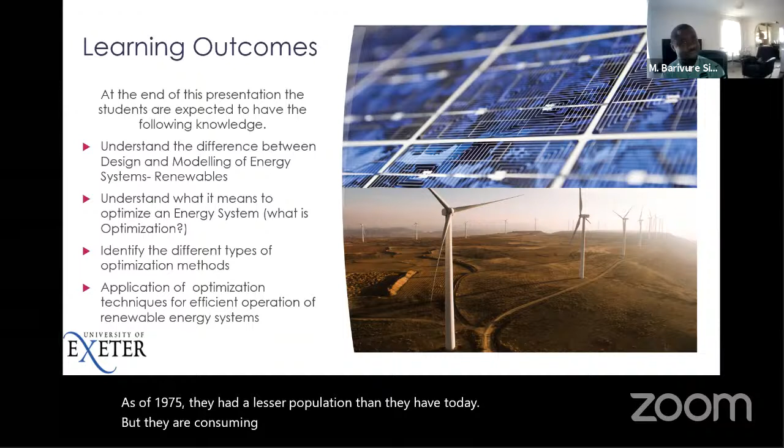I was reading through the United Kingdom energy report, and as at 1975, they had a lesser population than they have today, but they are consuming less energy today than they consumed in 1975. The population increased, but the energy consumption reduced.

What do you think has happened within these 45 years? What do you think has happened? It's all about energy efficiency. They have things now that consume less energy than they used to consume in the past. So energy efficiency has come into play.

And for us to operate our system efficiently, we need to optimize. So this is an aspect we will be looking at.

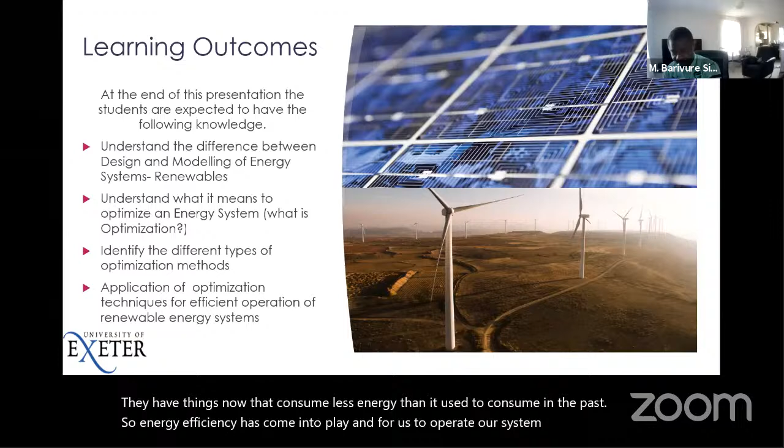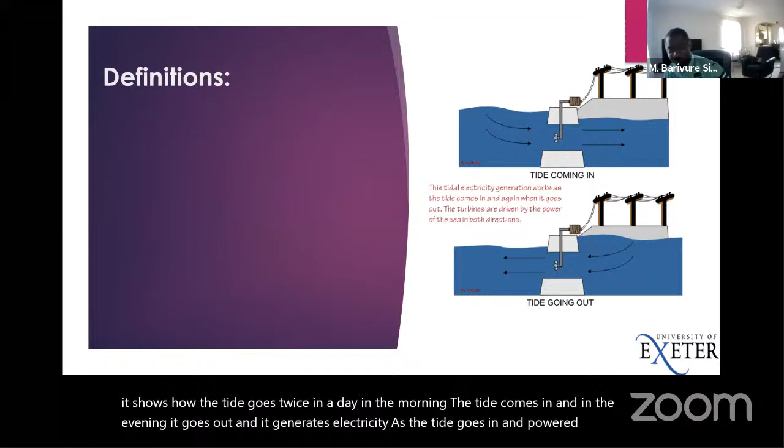Okay, so we look at some basic definitions. The picture on the right is just a sample of a tidal turbine that's rotating, and it shows how the tide goes twice in a day. In the morning, the tide comes in, and in the evening it goes out, and it generates electricity as the tide goes in and out. Irene seems to be an expert in this area because she does a lot of hydrodynamics, so she understands a lot of how this happens.

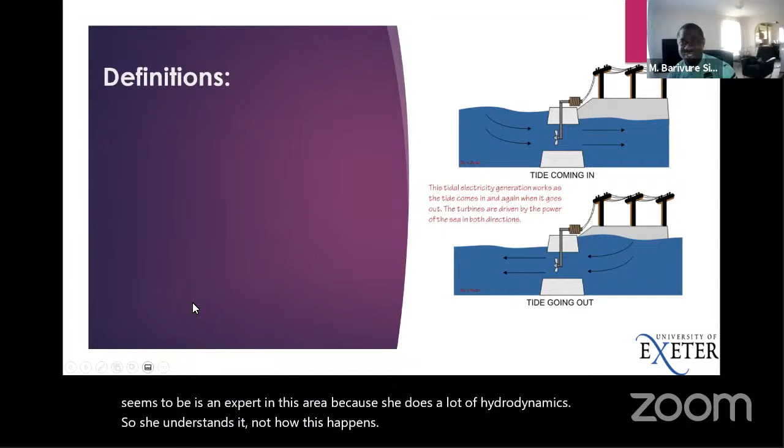Okay, so the first thing we'll define here is engineering design. I did ask the question—nobody, don't be scared, there's no wrong answer. There's absolutely no wrong answer. All answers are correct; they're subject to defense in a way. When you give an answer, you just need to be ready to defend it. It might not be right in a specific perspective, but it's not wrong entirely. So don't be scared, you just have to say so.

Engineering design is a method that engineers use to identify and solve problems. So what does that mean? For you to carry out a design, you must identify a problem, and then you go ahead to try to solve the problem. That's the design process. For example, you need a car because you take a long walk and want to get to your destination faster. That's a problem. Time—you try to design something.

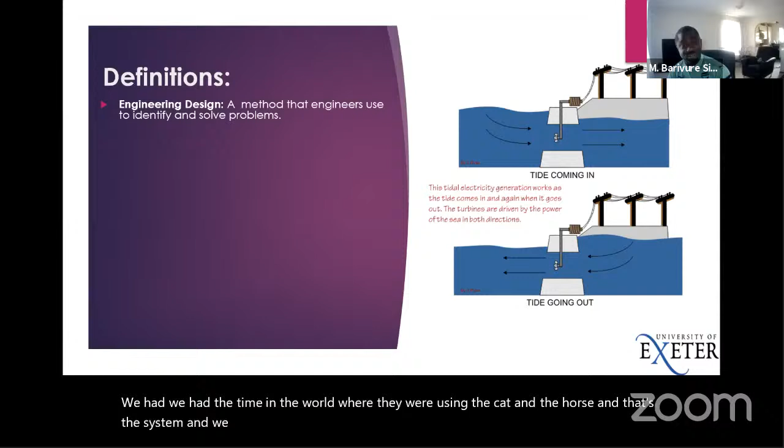We moved from designing... we had a time in the world where they were using the cart and the horse, and that's the system. We moved into building engines and all that, and now cars have become more efficient. Today we have electric cars. This is what engineers do—they design and they solve problems. So a method that is used to identify a problem and solve it is simply known as engineering design. This is a very simple definition. If you want to go into the details of engineering design, there's a lot of things we could look at.

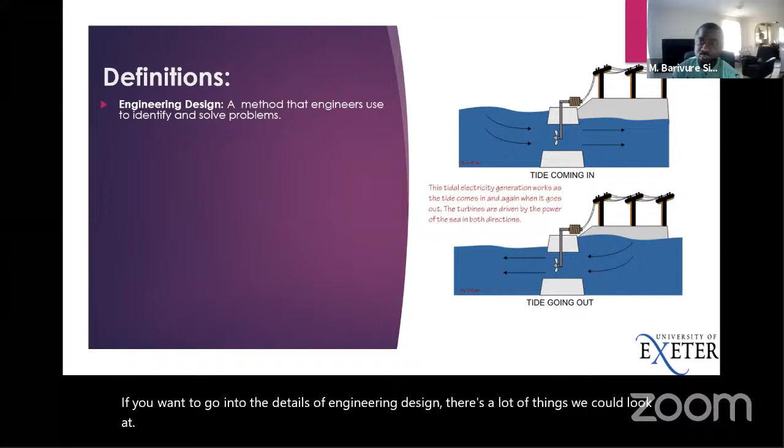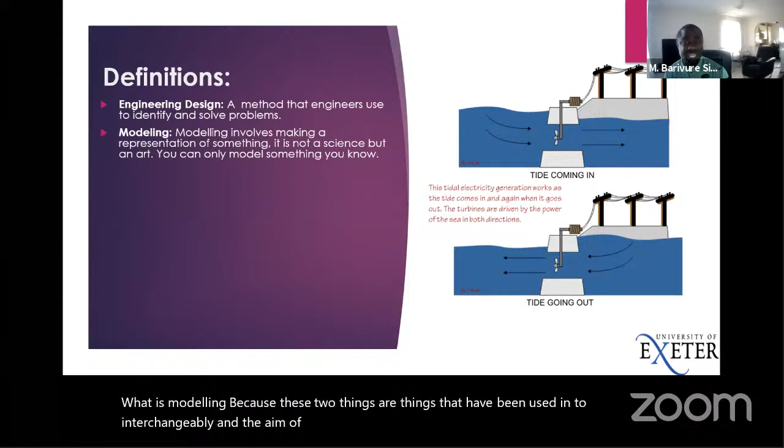So then, modeling—what is modeling? These two things have been used interchangeably, and the aim of this seminar is to create a clear distinction between the two of them. Modeling involves making a representation of something. It is not a science, but an art. You can only model something you know.

Now, if you go back to engineering design, engineering design does not tell you that you must know it. You identify it, then you begin to make effort to solve it. For you to model something, you must have knowledge about what you're modeling. And so that's why you must design before modeling.

Now, modeling is something that in the current day we are in, a lot of programmers model. So if you're a design engineer, you can design your work, look for a good modeler and work with the modeler, and he'll be able to model your design. Because when you model, that's when you can now improve on your design. It's a two-way thing—for you to model, you must have a design. After modeling, you can test your design and then improve on it. So there's a way: design, modeling, back to improving the design, then remodel, then implementation.

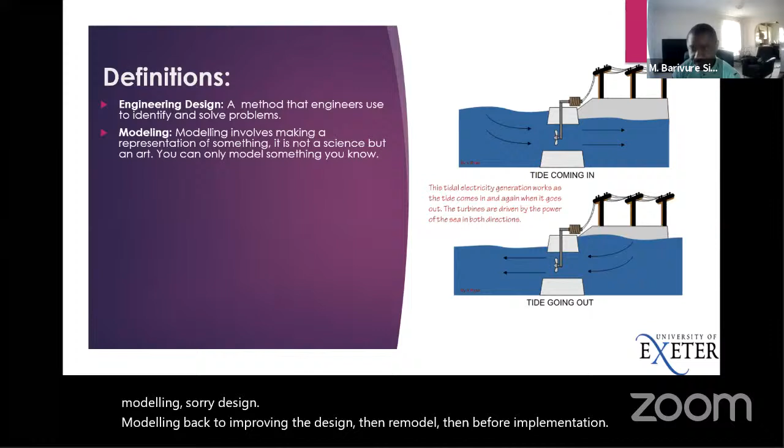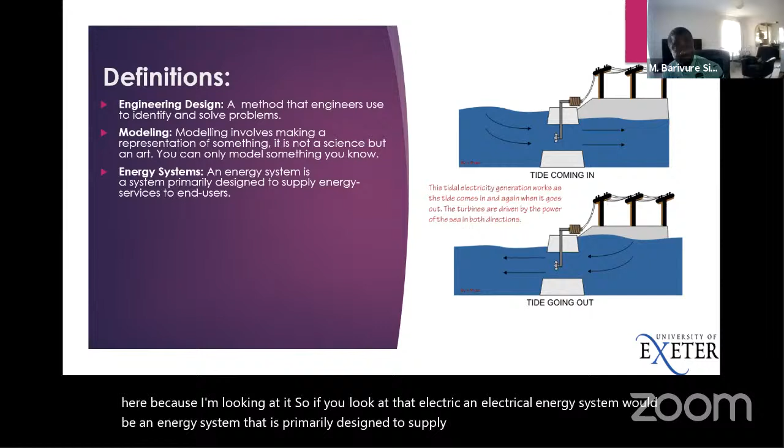So we're looking at energy systems. An energy system is a system primarily designed to supply energy service to end users. I did not specify what type of energy here. So an electrical energy system would be an energy system primarily designed to supply electrical energy services to end users. If you want to look at any other energy systems, what it will do is primarily supply that type of energy to whoever needs it.

And that's what energy systems are.

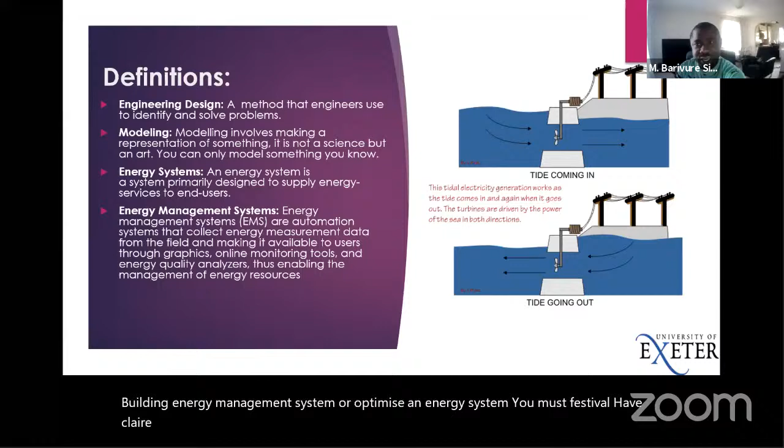Then we look at energy management systems. This is the base of optimization, and this is the area we're going to be focused on in this presentation: energy management systems and optimization. But I need to give you a brief review of some of the steps that lead us here. You can't just begin to build an energy management system or optimize an energy system. You must first have a clear understanding of certain things that could lead there. That's why we're coming from engineering design, modeling, understanding what an energy system is, and then we look at what an energy management system is.

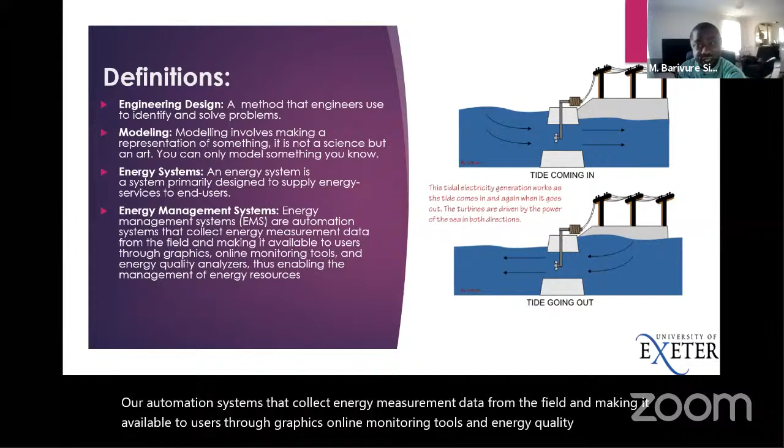An energy management system, popularly called EMS, is an automation system that collects energy measurement data from the field and makes it available to users through graphics, online monitoring tools, and energy quality analyzers, thus enabling the management of energy resources. So what does an EMS do? It sits between different energy sources.

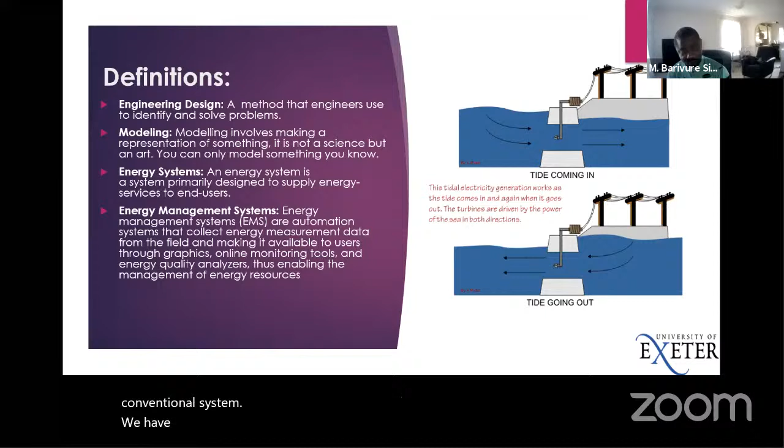So if you've got three different energy systems, let me come out a bit from the renewables and look at the conventional system. We have a gas turbine, a diesel generator, and a coal-fired plant. These are three different types of conventional energy systems using different fuel systems, though they are all thermal systems. Now, an energy management system can sit in between these and decide which source to use at every point in time, depending on the load.

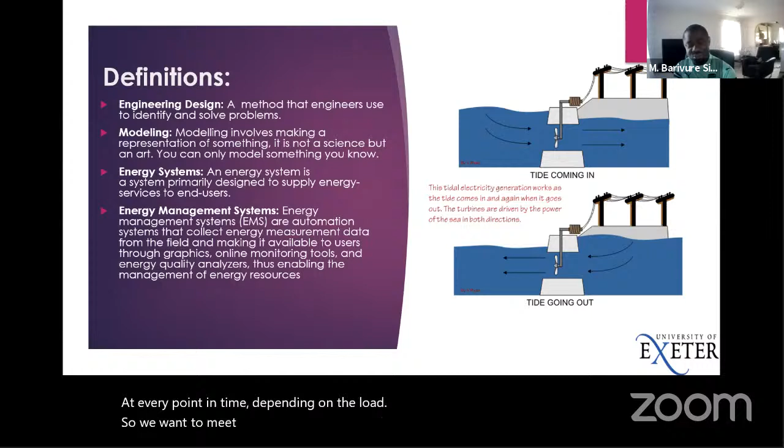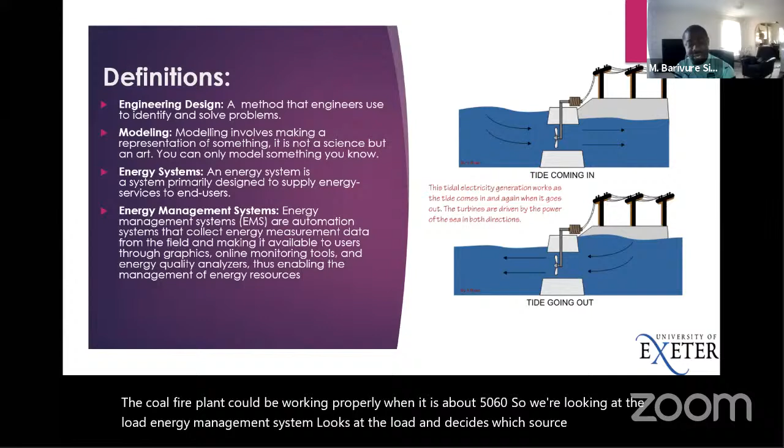So we want to meet a load, and you look at these three systems. The gas turbine works more efficiently when operating at about 80% and above. The diesel generator works efficiently when below 50%, giving you lower cost. The coal-fired plant works properly at about 50 to 60%. So we are looking at the load. The energy management system looks at the load and decides which source should power the load at every point in time. That's what it does—it manages the system efficiently to minimize and reduce the cost of operation.

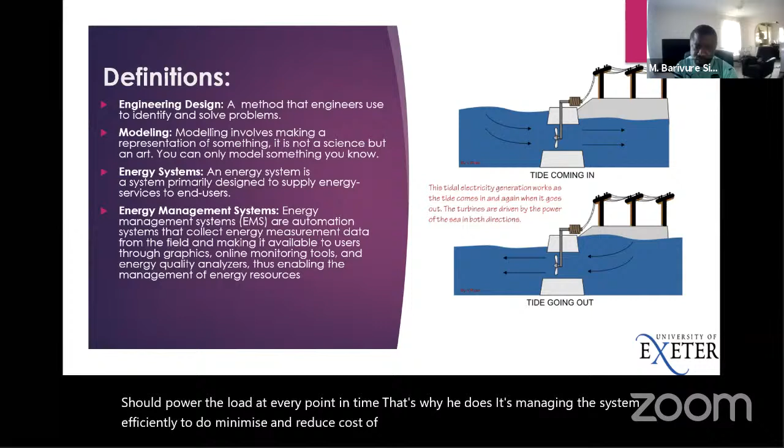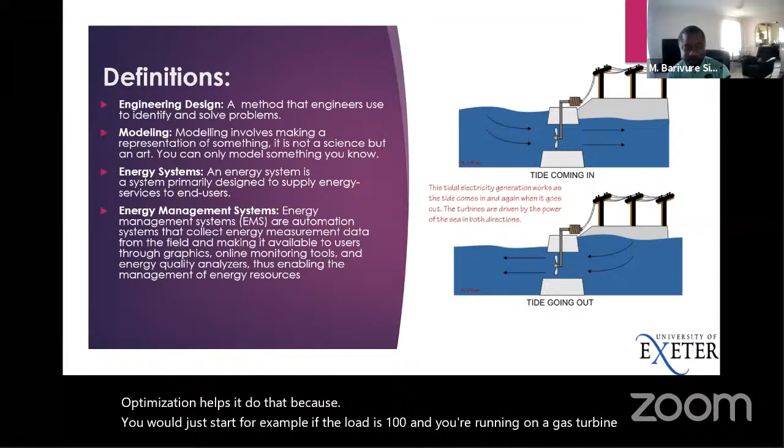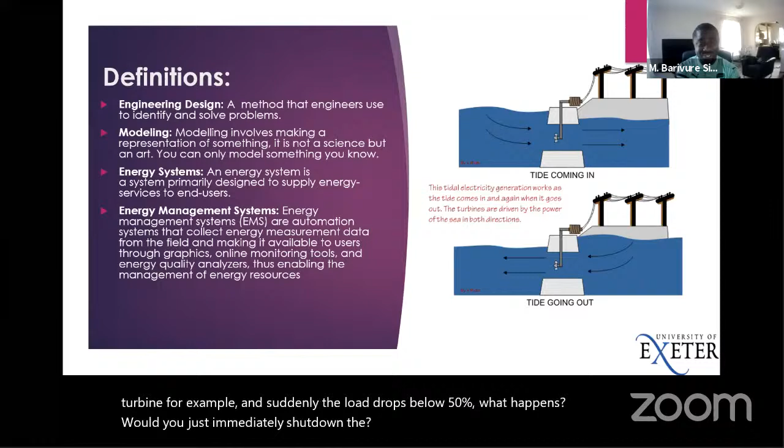Now the idea is, when it does that, how does it change from one turbine to the other? And that's where optimization comes in. Optimization helps it do that, because you wouldn't just start—for example, if the load is at 100% and you're running on a gas turbine, and suddenly the load drops below 50%—what happens? Would you just immediately shut down the gas turbine and begin to use the diesel generators? How would that happen? The optimizer does all of that for you. And that's why you need to understand the modeling. Then you bring in the energy management system, and then optimization comes in to solve the problems.

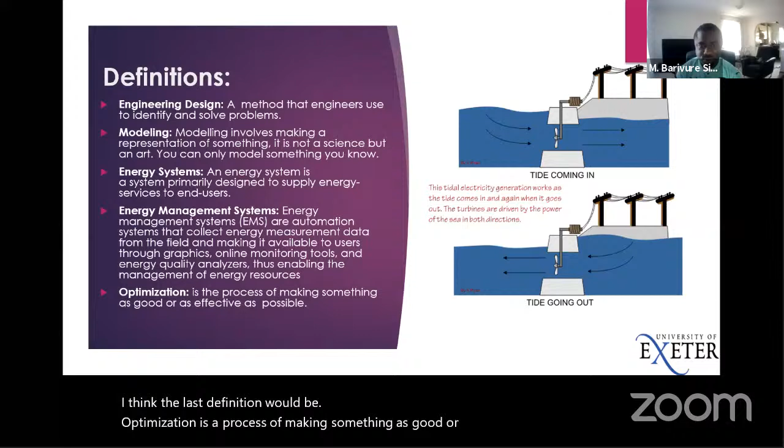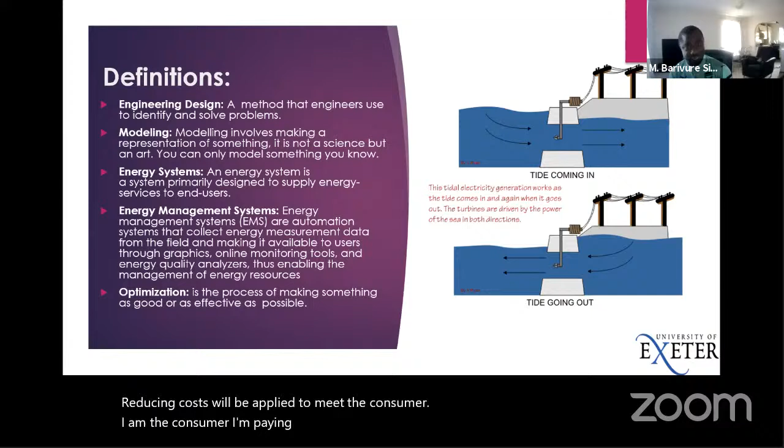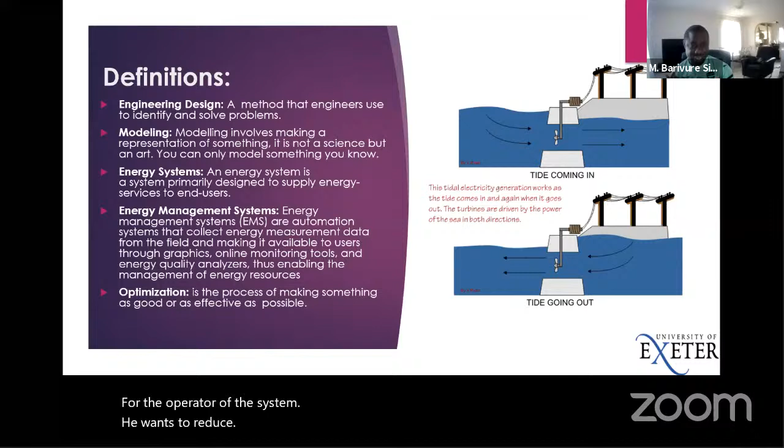I think the last definition would be optimization. Optimization is a process of making something as good or as effective as possible. So in energy systems, we look at three things: we want to reduce cost, we want to reduce our energy consumption to make it more efficient, and we also want to minimize cost. There's a difference between reducing cost and minimizing cost. Reducing cost applies to me, the consumer—I am paying for electricity and I want to minimize the cost I pay for it. For the operator of the system, he wants to reduce his cost of generating electricity. So we have these three networks put together: you want to minimize cost, reduce energy consumption, and minimize cost. These three things put together is what the optimizer would do.

So let's look at the different types of renewable energy systems and do a bit of explanation of how they operate, so that we can now look at the modeling aspect.

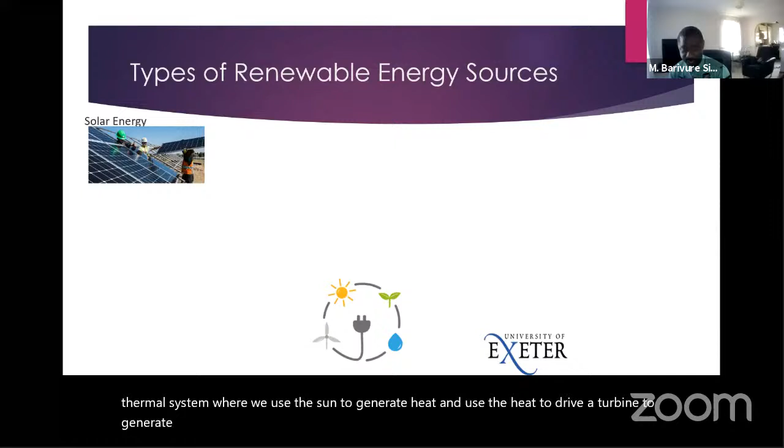So we have the solar power system. We know the solar power system is just converting energy from the sun to electrical energy. Our focus would be the solar PV systems, because there's a solar thermal system where we use the sun to generate heat and use the heat to drive a turbine to generate electricity - that's another system. The solar energy system produces direct current voltage because it has no rotating parts, so wear and tear is protected in this system since there's no friction going on, which keeps the system safe.

So we look at how does the sun generate its power? The power from the PV, this equation is what is used to generate power from the PV panel. If you look at it clearly, it's a model - this is how models are developed. You look at the solar panel and then you begin to develop the model, normally called a mathematical model: PPV is equal to APV, IRPV, and ηPV.

What this represents: this is the area of the PV panel, this is the irradiation - the radiation that falls on the PV panel - and this is the efficiency of the panel. That's the three main components. But the main things considered are the area of the panel and the radiation of the sun. Those are the two things considered in order to generate power from the PV system.

Now the efficiency is very important. How is this efficiency defined? We have a second equation that defines the efficiency of the panel, because you could have a particular area and a particular irradiation, and by the time you put them together to give you a good number, but by the time you actually measure what comes out of the PV panel, it is far, far short of that. What's the reason? The efficiency of the system, defined using this equation.

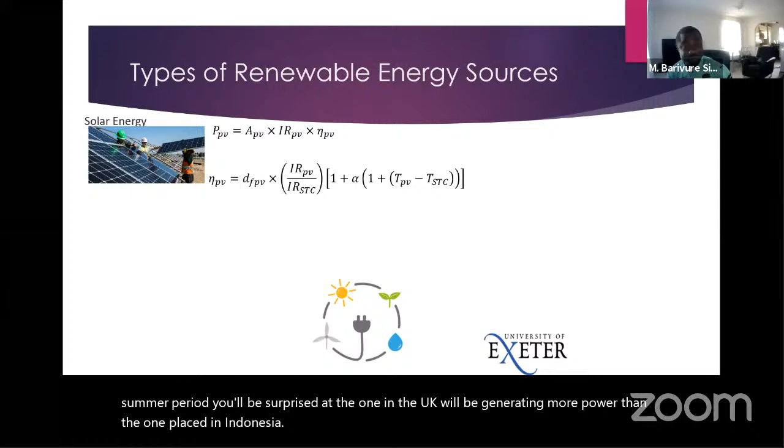You'll be surprised that if you put the same size PV system in Indonesia and the same size PV system in the UK during the summer period, the one in the UK will be generating more power than the one placed in Indonesia. What will be the reason? Maybe during the summer in Indonesia you're getting 30, 35 degrees temperature, while in the UK they're hardly seeing 20, 22 degrees, which is below the standard test.

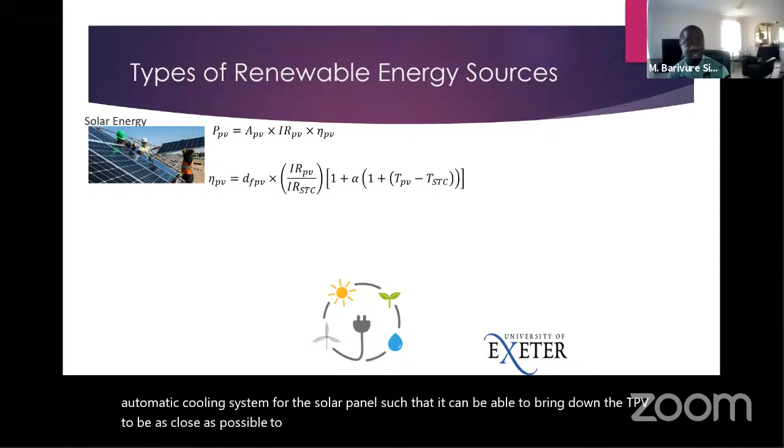So the efficiency of the PV panel would be higher here, and so it will give them more power than having it in Indonesia. Now this is a subject of many research studies. A lot of researchers are going into trying to develop cooling systems that will create automatic cooling for the solar panel, such that it can bring down the temperature of the PV to be as close as possible to the standard temperature required to run the panel. Many researches are going on in that area.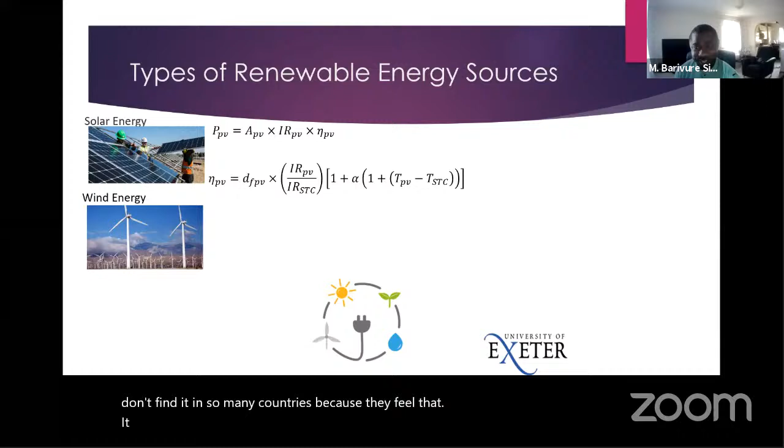So we have the wind energy system. This is a big subject of controversy because a lot of people don't even want it - that's why you don't find it in so many countries, because they feel it defaces the environment. Having this rotating thing all the time is not as beautiful as people would presume it should be. So it's a subject, and it's a rotating system. It can produce AC or DC depending on the converter system that is used.

Because it is rotating and has a rotating magnetic field, the output power of a wind turbine would be AC. But because the fuel that drives the turbine is not controlled by you or me, it is nature. We do not know the wind speed; it keeps changing with time.

So the AC power produced from the turbine would be fluctuating. That's why we have what is called maximum power point tracking, where you convert that AC to DC, and then convert that DC back to AC in order to get a smooth power out of the turbine. This process has a lot of losses as well.

We'll look at the equation that produces the wind power. The wind operation, the tidal operation, and the hydro turbine are all the same because they are all working on a rotating system. So they have a very similar system.

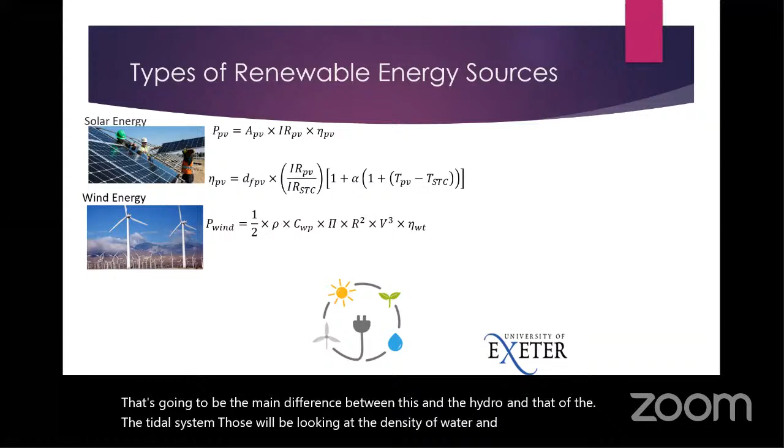You have the density of air. That's going to be the main difference between this and the hydro and tidal systems, which look at the density of water. Water is far more dense than air, and that's why you can see your water, but you cannot see the air, you can only feel it.

So for the wind turbine, you have the density, you have the power coefficient, and because it is rotating in a circle, you have pi, you have the radius, and you have the velocity, which is the actual speed. And then you also have the efficiency of the turbine. This is what is considered.

In designing the wind turbine, there are certain stages that they look at. One stage is what they call the cut-in wind speed, they also have the cut-out wind speed, and they have the operating wind speed. So you could have a wind turbine where the wind is at a certain level, but it is not generating power because it is not up to the cut-in wind speed.

There's a level the wind will get to where it will not be generating. Though you'll be very surprised, you'll feel there's so much wind, but the turbine will not be generating because it is not designed to stand that kind of wind. So it will just lock itself and stop operating. That's the way the wind turbine is.

We have the hydro system, and the hydro system uses water just in place of wind to drive a turbine and generate electricity.

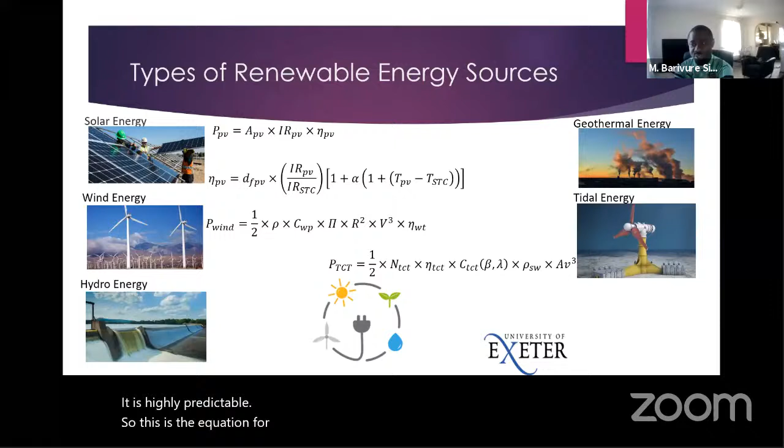So this is the equation for the tidal turbine. If you look at the equation for the tidal turbine and compare it with the equation for the wind turbine, you would see that they are closely related.

Biomass. We all know what biomass is. That's another source of renewable energy. These are the six main sources of renewable energy. There's also the wave energy converters, which are also renewable.

And if I may ask, to make it a bit interactive so that I don't just keep talking, is a nuclear energy power station a renewable energy station? Can somebody just give me that answer? A nuclear energy station, is it a renewable energy system?

Marvin asked, is the question only for students, or can lecturers also answer? Students should answer, oh students. I'm sorry, so I cannot give the question to other people then. Okay students, you hear from Marvin, so it's time for you to answer.

Yeah. Okay. I want to answer. Okay, just say your name. Say your name. Oh, I'm sorry. My name is Avicenna. Okay, Avicenna. My name is Avicenna. I'm from PENS, Surabaya.

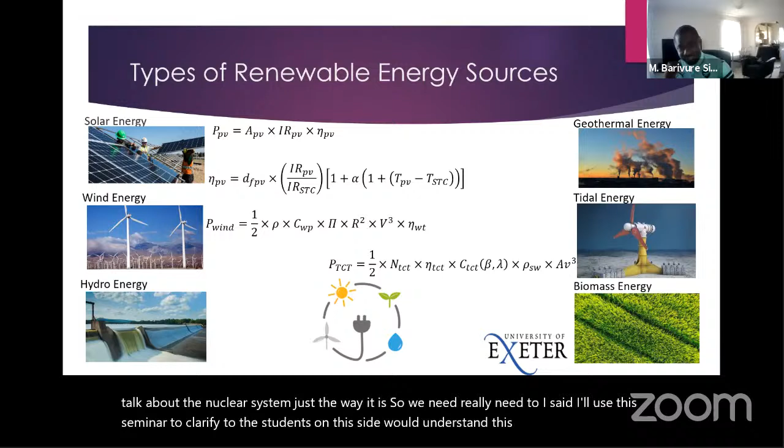So I said I'll use this seminar to clarify, to see if students on this side would understand or know this, so we can clarify it once and for all. If that's all you take from this seminar, it's a plus for me. Any other view?

Okay, I'll answer the question. The nuclear power plant is non-renewable, because nuclear reactors make use of uranium. Uranium is a source of energy, but it is not renewable. It is produced and buried under the ground. That's why they don't build nuclear stations everywhere. Most nuclear power stations are built very close to the sea, where they store the uranium under water for cooling, because if it begins to explode, it's an issue.

Now, the fact is that the nuclear power station is non-renewable, but it is clean. That's why, in the talk about reducing carbon on the earth and trying to turn down the conventional power system, they tend to allow the nuclear power system to function. Though it's expensive to build and expensive to maintain, it lasts thousands of years. But it's a non-renewable system. You need to know that, but it is a clean energy system.

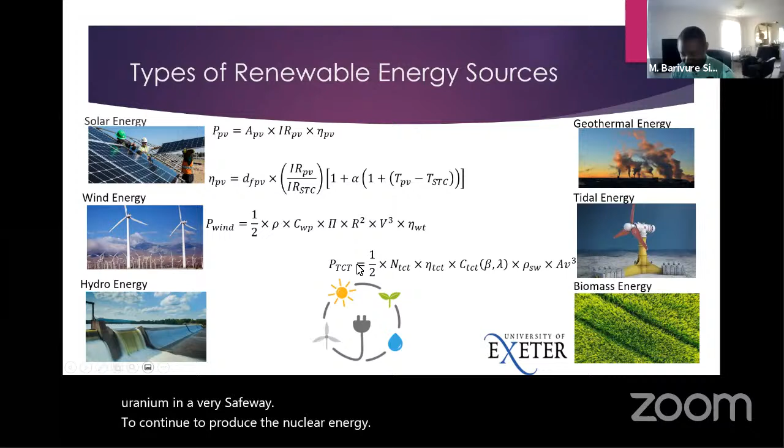Now, energy storage. I added energy storage at the last minute to this presentation. We're talking about renewable energy. We are not in control of the fuel that renewable energy uses. It's nature. We cannot tell when we will have sun and when we will not, although we can predict it. And sometimes you have excess sunlight, you produce energy and it's wasted. So we need something to store our excess energy and use it.

For example, for a solar powered system, during the night you don't have any solar. You have solar power during the day, maybe from 10 a.m. in the morning to 4, 5 p.m. in the evening. So if you generate more than you need, you store it. Once the solar is down, you use the storage rather than going back to the conventional system. Energy storage serves a lot of functions, and we will see what those are from the generation part to transmission, distribution, and down to the consumer.

So for the generation, this is what the energy storage does. What's called AGC could be also known as fast frequency response. So it's automatic generation control. So we know that when load begins to change, when you're generating power and load begins to rise and fall, for example, in a conventional system, there's what is known as the ramp up time and the ramp down time of generators. So generators don't just ramp up. So if the load changes very fast, the storage system can act as a fast frequency response, so it can cover up for the load increase for the period while the generators are ramping up.

So it does that. It does primary frequency control, which is what I've just described. You know, power has to be run at a certain frequency. I don't know what frequency Indonesia runs on, but here in the UK, we run on a 50 hertz frequency. So once the frequency begins to drop below 50 hertz, there is a problem. And so the energy storage system is used to cover this. So once the system is getting overloaded, the frequency begins to drop. As the frequency drops, the energy storage system can respond very fast and take the frequency back to normal, saving the time while the conventional generators ramp up.

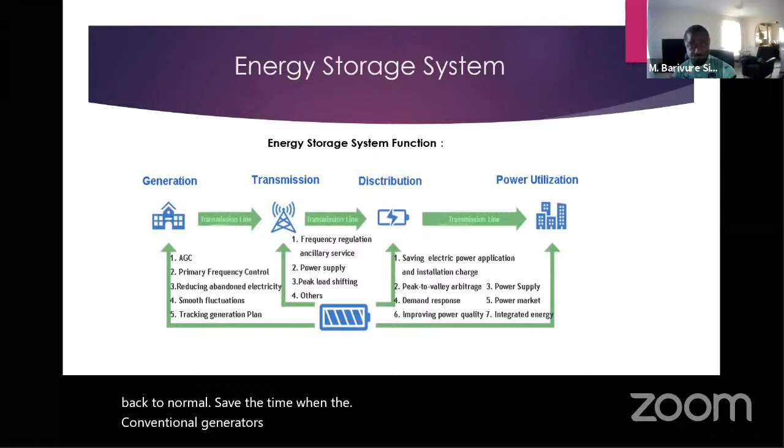So it reduces abandoned electricity. I explained that when we were talking about the solar panel. When you have excess solar, instead of dumping it, you store it in your storage. It smooths fluctuation. So you see, for renewable energy systems, we don't have a control. We have lots of fluctuations. The energy storage system can come in to manage those fluctuations. All of this has to be done in a very optimal way, and that's why we talk about optimization. You can also use it to track generation plan.

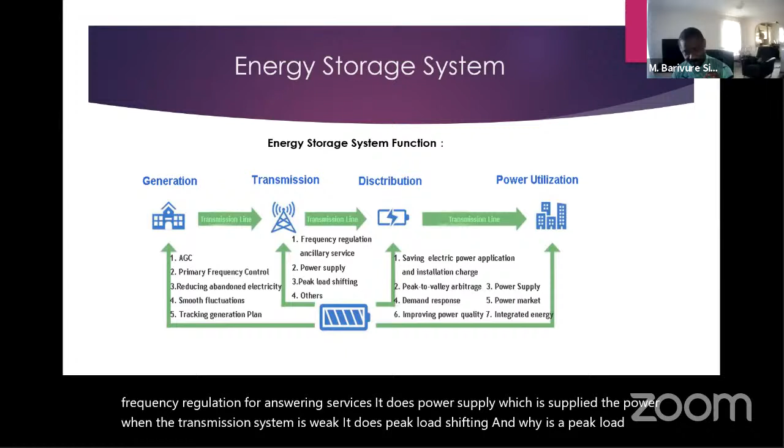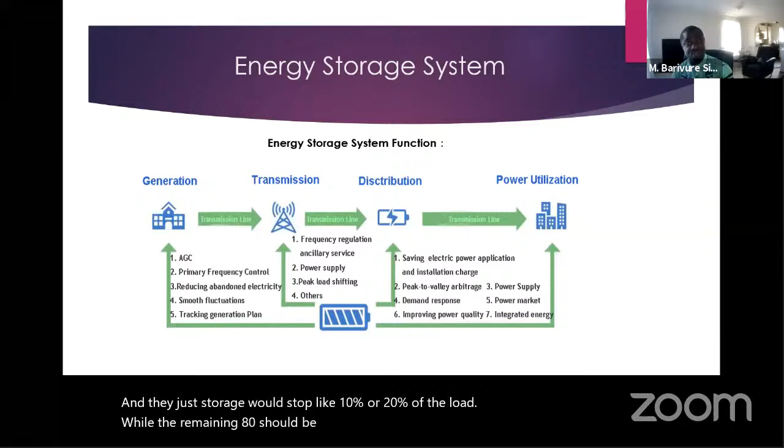For the transmission system, it also does frequency regulation for ancillary services. It does power supply, which is supplying the power when the transmission system is weak. It does peak load shifting. And when you say peak load shifting, for systems that have got a tariff model, maybe in the middle of the night, you've got low tariff, and during the day, you've got higher tariff. So if you charge your battery at night, during the day, you can now do a bit of peak load shifting. You can decide that, okay, my energy storage would supply 10% or 20% of the load, while the remaining 80% would come from the conventional system, and that reduces your energy tariff.

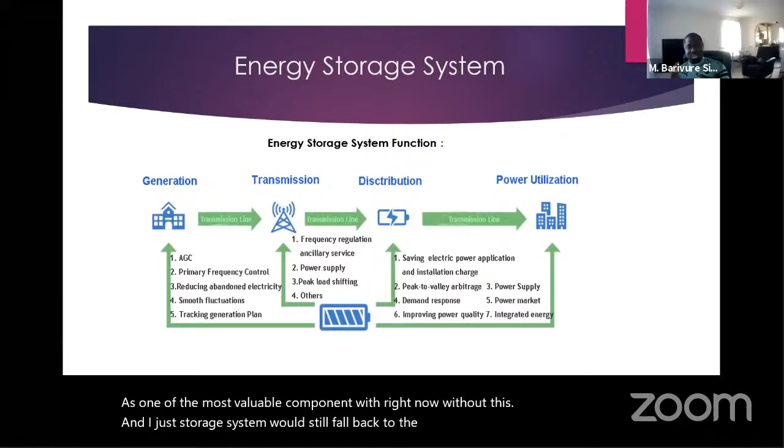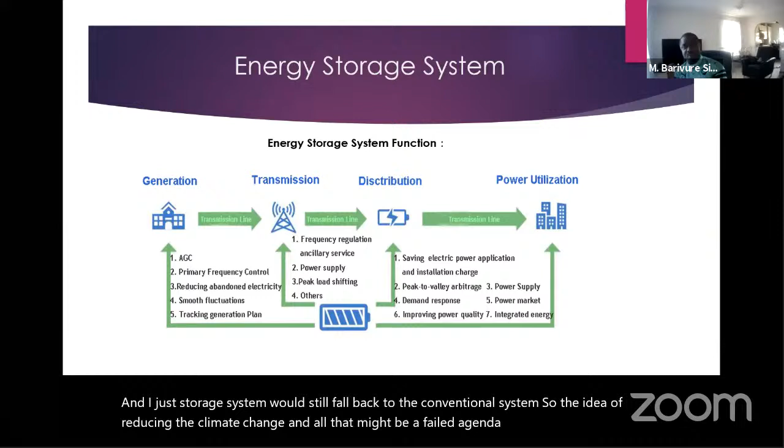For the distribution side, it saves electric power application and installation charges, peak to valley arbitrage, demand response. So that's like fast frequency response, and it improves power quality. Then it is used for an integrated energy market. So in the new system we have, which is the renewable energy market, the energy storage is one of the most valuable components. Right now, without this energy storage system, we will still fall back to the conventional system. So the idea of reducing climate change might be a failed agenda if energy storage does not ramp up to meet the challenge. Okay.

So we'll look at design of renewable energy systems. I'll just talk about two designs here because our time is already far spent, and I'll go through them very fast. I wouldn't spend as much time as I have spent earlier. To design a solar PV system, the following components are required. We'll just look at it. The PV module that converts the sunlight to electricity. The maximum power point tracker. I didn't talk so much about this, but what this does is to track maximum power from the PV system.

If you look at the PV power curve, it goes round and there's a maximum power point, where at every point in time, you want to get the maximum out of what is produced. It's a power electronic device, and what it does is just track maximum power. You find this in every variable system, like the wind turbine, the tidal systems, every renewable energy system where you cannot predict the output at every point in time. It's a very important component in renewables. Then we have the inverter, because the power that we use at home is AC. So if the PV generates DC, we need to convert that DC to AC, and that's what the inverter does.

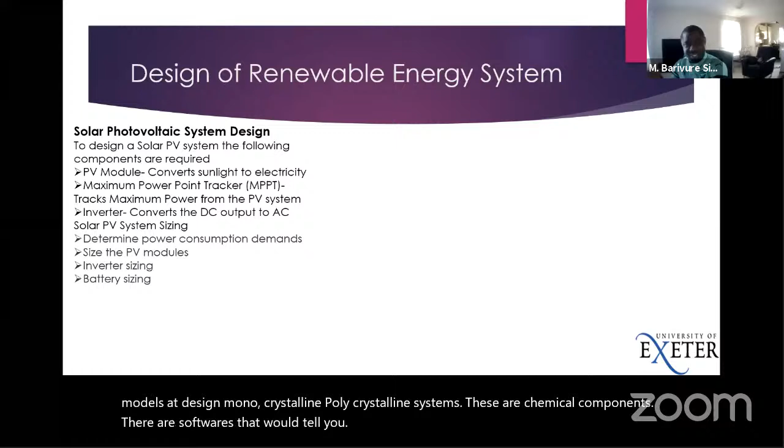There are softwares now that will do all of this. So once you have all the basic information, all you need to do is to input that information, and it will tell you the actual size. Funny enough, it can even tell you the type of PV system, because there are different types of modules designed, monocrystalline, polycrystalline systems. These are chemical components. There are softwares that will tell you the exact type you should use for a specific area based on the kind of sunlight or irradiation you have and the load pattern you have. It will tell you exactly the sizes. And once you apply that, you would get optimum efficiency.

Solar charge controller. If you have a battery, you don't want to destroy your battery. That's one thing, you don't want to destroy them. Batteries are a very delicate issue. I could talk about batteries for very long because I've been studying batteries for a while. In battery models, normally the manufacturer would tell you this battery should last you for say 10 years. But you could get into using that battery, and after 4 years, the battery dies. That means there are certain things the manufacturer may not have given you in detail.

If my battery will last for 10 years, there's a condition under which that battery has to be operated for it to last those 10 years. Anything below that could shorten the life of the battery. And so all of these are things that you can do within system design, modeling and optimization.

We'll look at the wind turbine system. And this is what the wind turbine system looks like in detail. So this is not just a turbine now. We'll look at the mechanical components in the wind turbine. We'll look at the direction of the wind. We'll look at the rotor, which is the blade that rotates, and the hub. Now I'll give you this. If someone can answer me this, I'll be very happy. What's the difference between the wind turbine and the fan in your house? They've got blades, they rotate.

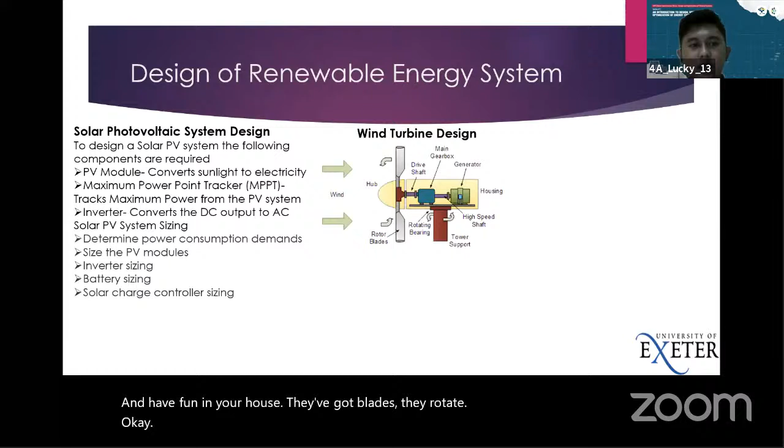I want to try to answer. Okay, my name is Lucky. I'm from Penn. Wait, can you hear my voice? Yes, I can hear, but if you're louder, I would appreciate it.

Okay, sir. I think the difference between the wind turbine and the fan in my house is that the wind turbine uses the wind to rotate the turbine to create electricity, but the fan uses electricity to rotate the blade. I think.

That's correct, that's the difference. This one uses the wind to generate electricity for use, while the fan in your house uses electricity to generate the wind or breeze in your house. That's the main difference. If you look at both of them, the structure seems similar - a ceiling fan has 3 blades, just like the wind turbine.

You also have wind turbines. What we have here is the horizontal system, which is the most common wind turbine. You have the vertical system wind turbine, which is not very common because its energy efficiency is quite low. So that's why people now go more for the horizontal axis wind turbine.

But the wind turbine has these few things. The wind comes in from here, hits the blade. As the blade rotates, the rotor, which is hidden inside the hub, rotates. Then it begins to work like any other generator, like your diesel generator. Once you power it on, the rotor begins to rotate and generate alternating current. That is how this happens.

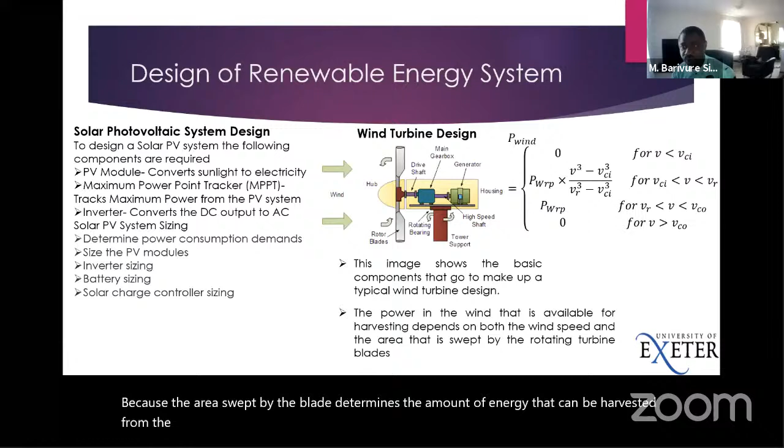So let's look at the modeling. What's energy modeling? By definition, energy modeling or energy system modeling is a process of building computer models of energy systems in order to analyze them. Energy models employ scenario-based analysis to investigate different assumptions about the technical and economic conditions at play.

Now, this is what I like to explain - this is quite exciting, because once you have concluded the design, now you want to play with the system, test the system, and look at how sustainable your system is. You use computer models. Like I told you, it's an art. The design aspect is core engineering - you must have engineering knowledge to design an energy system. But the modeling aspect, anybody can model.

Anybody can model. All he needs is information about the design, and he'll be able to model. And then we model because we want to test different scenarios.

Like we talked about the wind speed, we talked about the operating wind speed lying between the cut-in wind speed and the rated wind speed. We also talked about it lying between the rated wind speed and the cut-out wind speed. So once it is operating at this condition, when you want to test it in a model, you can begin to adjust the operating wind speed, and you would get to the point where you would see the turbine fail in your computer model.

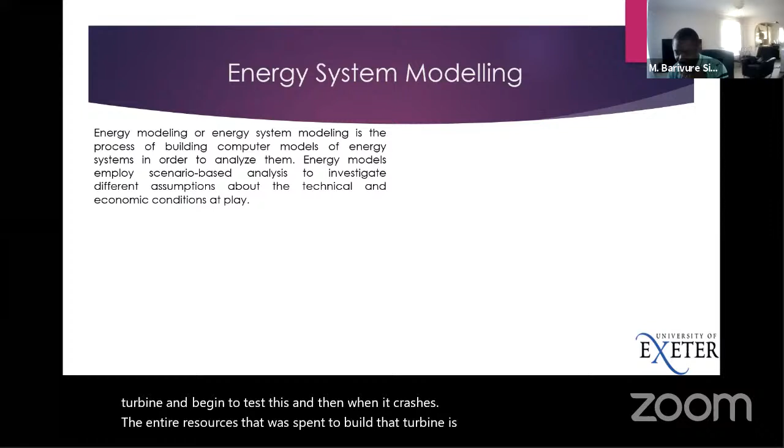Recently, if you follow what's happening in America, one of the unmanned space rockets was launched, and as soon as it took off, it exploded. That kind of system's design was modeled. Maybe they tested it to an extent, but when the conditions changed and went beyond the limit of the test or the scenarios they considered, the rocket came down. Although nobody died because it was unmanned, if people were inside, they would have lost everybody. That's the importance of modeling.

Classification of models in power systems, because what we are focused on now is renewable energy generation. So we have the electricity sector, we have system operational models, and we have power system simulations. Now, what's an electricity model?

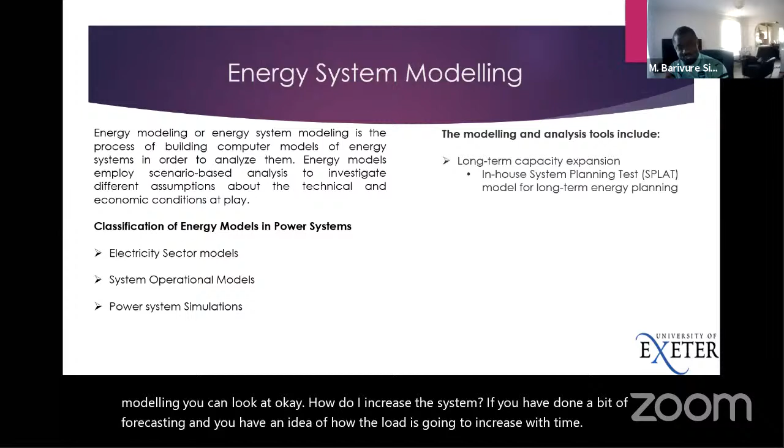The modeling and analysis tool includes long-term capacity expansion. I talked about expansion, so in modeling you can look at how do I increase the system. If you have done a bit of forecasting and have an idea of how the load is going to increase with time, with the models you can begin to change and say, after 5 years, this is what we're going to do. So it's an in-house system.

This SPLAT is a kind of software you can use to do long-term capacity expansion. If you follow it very well, you would be able to sustain energy continuously because you would plan your expansion according to your predictions. In most developing countries today, we don't have a constant power supply, and it's because we don't have good models, so we don't have long-term capacity expansion.

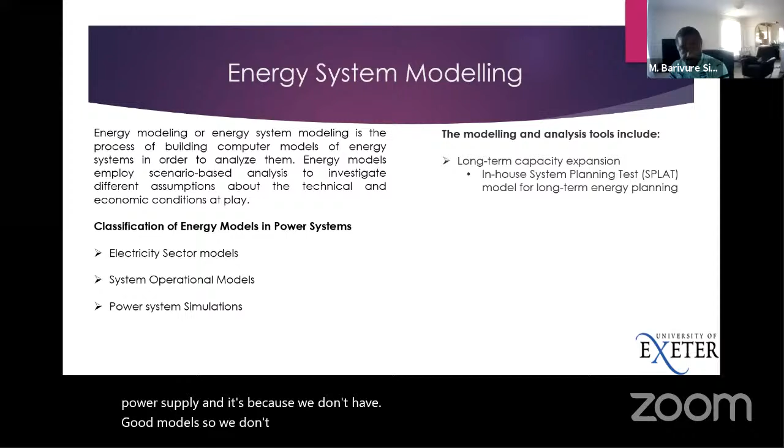In the long run, we have energy generating today that meets our load. Suddenly the load goes so high and then we cannot meet the load anymore because we don't have a proper system for modeling, for planning. So you have unit commitment and dispatch.

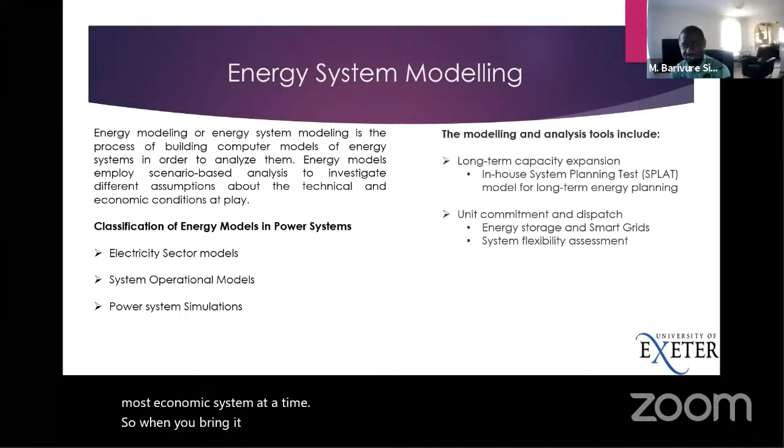Unit commitment and dispatch, in most cases, does not apply in renewable energy systems. But if you look at a microgrid that is grid connected, you can look at unit commitment and dispatch. Dispatch is fine, but unit commitment mostly works with conventional systems because you have to commit the most economic system at a time. So when you bring in energy storage, smart grid, system flexibility assessment, these are things you do when modeling. Modeling is broad.

So you have operational planning, grid integration studies. All these are done within modeling. When you're doing operational planning and grid integration studies, all these are done within modeling.

Energy models are usually intended to contribute to system operation. I put the red, engineering design or energy policy development. Why I put engineering design is because we've talked about design before. So I said, you can design, model, and then go back to redesign. So when you design a system and model it, you put it to test, and you find out things you need to do more, so you go back into design. Energy models could help you improve on your design. That's why I put engineering design in red.

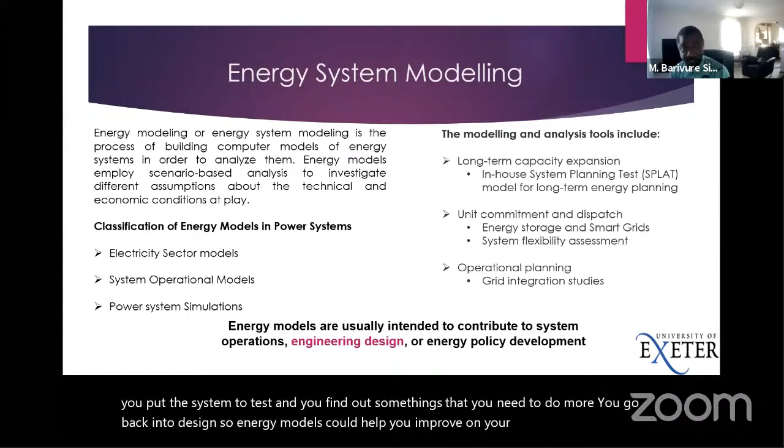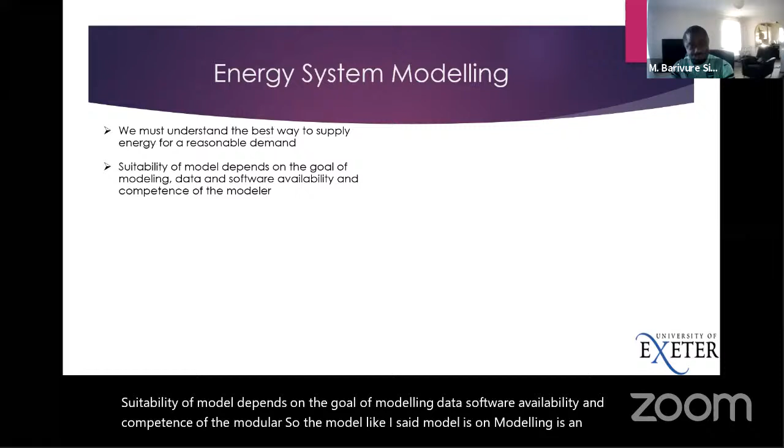So what we must understand is the best way to supply energy for a reasonable demand. If you want to model, you must understand the best way to supply energy. Suitability of a model depends on the goal of modeling, data, software availability, and competence of the modeler. So modeling is an art, and you can develop your competence in modeling depending on what you know.

Model types: supply-based model, demand-based model, hybrid models. So when you look at supply-based models, what would that be? From the generation side, demand-based model from the demand side, hybrid models when you combine the two and model them together, or you have various energy systems being modeled. Those are hybrid models.

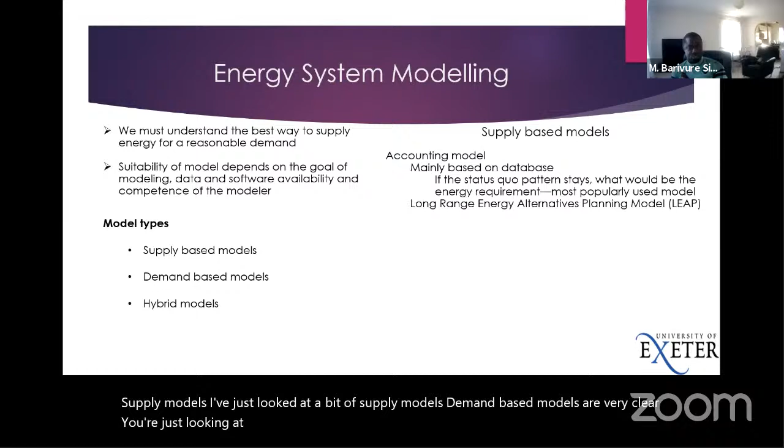Supply models, I'll just look at a bit of supply models. Demand-based models are very clear — you're just looking at demand side management and modeling the demand side based on predictions and all. But for the supply-based model, this is an area that is very important because you want security of supply.

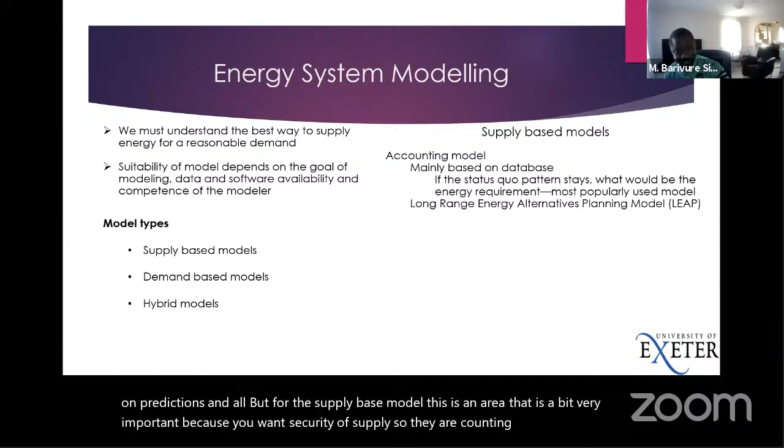So there are accounting models, mainly based on database. You have information — the database information could be past data gathered, predicted data, all put together. It is the status quo pattern. What would be the energy requirement in future? For you to do a sustainable supply-based model, you need to be able to tell what's going to happen in future. It's the most popularly used model.

Long-range energy alternative planning, LEAP. So you could develop an alternative just in case things change — what are we going to do? So you have the optimization models, linear to non-linear optimization models. Develop a multi-period linear optimization model with stochastic and non-stochastic parameters, combining generation and transmission. Can someone just tell me, what do you understand by stochastic models?

Stochastic parameters — because I don't just want to use words and then at the end of the day, we just say stochastic parameters. What makes a parameter stochastic? If we can define stochastic, then we can tell what is non-stochastic. So non-stochastic, we can call that deterministic. Is the question for students, Marvin? No, anybody can answer. Okay, but I still want to give it to my students. Okay, students, please answer Marvin's question.

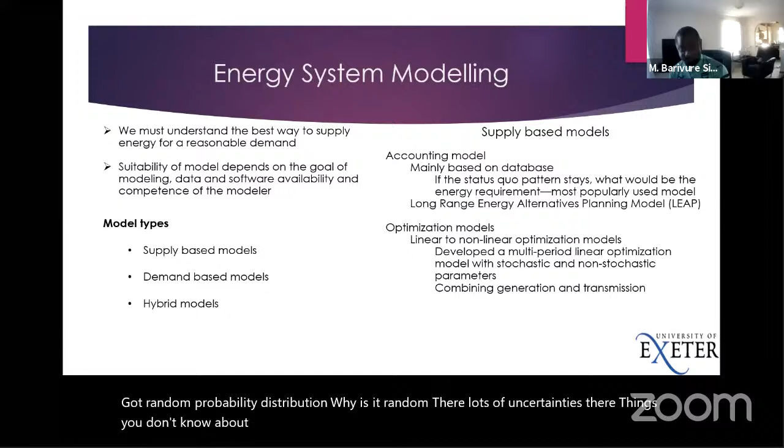Why is it random? There are lots of uncertainties — things you don't know about it. And you model these uncertainties into the system, and then it becomes stochastic. Non-stochastic is determined data — you know exactly what it is, you know everything about it, so you can apply some. But when you're dealing with renewables, you know it is a very deep stochastic system. You cannot tell what you are going to get the next minute. But you can model it with some level of uncertainty, and that's why you use predictive models — you apply some predictions, and then you can also check your errors, the difference.

By the time, if I predict tomorrow's load consumption, for example, at the end of tomorrow I'll be able to tell the difference between what my prediction was and what we actually got. And if I have those kinds of predictions continuously, I can have that kind of random probability distribution. I can apply that to a model and use it to test a model. So we don't know exactly what we are dealing with, but we are managing it within an uncertainty range. If you take out the uncertainty, it becomes non-stochastic — that means you know exactly what you're dealing with.

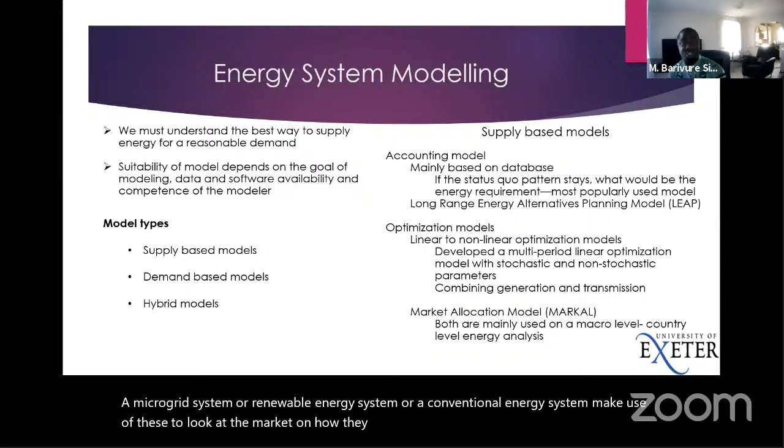The market allocation model — I don't normally talk so much about the market model because it's a different area of analysis. It has really nothing to do with the engineering design, but operators of a microgrid system, renewable energy system, or conventional energy system make use of these to look at the market and determine the cost of energy. It comes from the supply side, because if I'm supplying power, I need to know how much I'm going to sell my power at every point in time so that I make profit and get my return on investment.

So we look at energy management objectives. The primary objective of energy management is security and stability of the system. That's the primary objective; every other one is an add-on. If we have to achieve any other objective, that's a secondary or tertiary objective, and if we don't achieve security and stability of the system, then we have failed.

The secondary objective is economic operation and control. We want security of supply, we want constant power supply, but we want to do this in an economic way so that it is cost effective, because that could help the consumer. If I can do it in an economic way, I can reduce the cost of energy that the consumers will pay.

Then the tertiary objective is the optimization, which is operational planning and maintenance. If you go into history and look at when people started optimizing things, it took time, because they needed to know: if we apply optimization, are we still going to have the system working as normal? Because if we begin to optimize and the system begins to fail, then the optimization isn't worth it. That's why it's a tertiary objective. The main objective is for the system to continue running.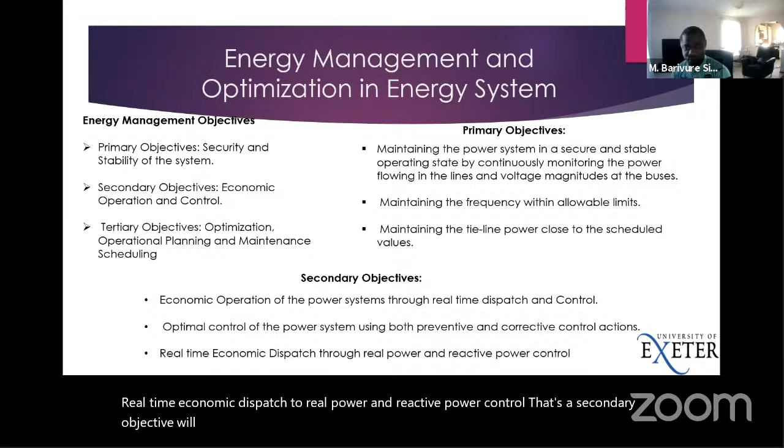The tertiary objectives: optimization of the power system for normal and abnormal operating scenarios, and optimal control of the power system by appropriately using preventive and corrective control actions.

Maintenance scheduling of generation and transmission systems. Maintenance scheduling is very important. With proper optimization, you will be able to tell when to begin to maintain your system. Take a wind turbine, for example — with proper optimization, you can say, okay, every 5 years we have to service the blade, we have to fix the rotor, to ensure that it runs continuously for another 5 years. It's an optimal process that you can use to determine that.

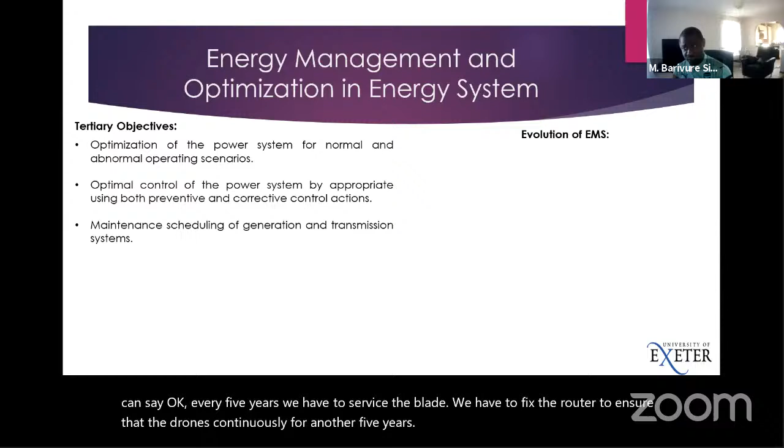So we look at how the EMS evolved over time. When it started in the early 60s, it was termed control centers, and what the control centers did was initially termed load dispatch centers — they were used to manage just load, to monitor the load and know how to dispatch power to meet the different sets of load. Then by the 1970s, it evolved into what they called energy control centers. So the first one was managing power; the second time it began to manage energy. Here the main task was to control the energy rather than the power.

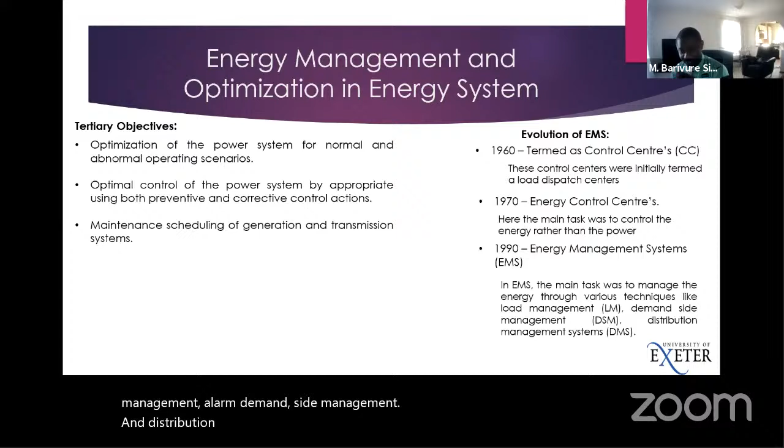And then in the 90s, it evolved into what we now have as the energy management system. So it's pretty new. The main task of the EMS was to manage energy through various techniques like load management, demand side management, and distribution management system. There's a difference between DSM and DMS.

The functions and benefits of the EMS: we have control functions, operating functions, and optimization functions. Then we have the planning function. We've had a little talk on control, operating, optimization. Planning is all about looking ahead and ensuring that we continue producing more economic systems, cleaner energy systems, to match up the demand for the future.

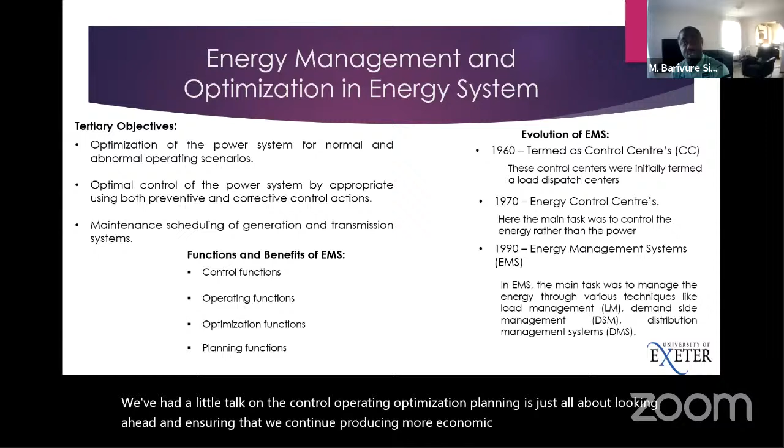Energy management control function: real-time monitoring and control function. It does automatic control and automation of power systems like automated interfaces and electronic tagging. It does efficient and automatic generation control and load frequency control, and optimal automatic generation and control across multiple areas.

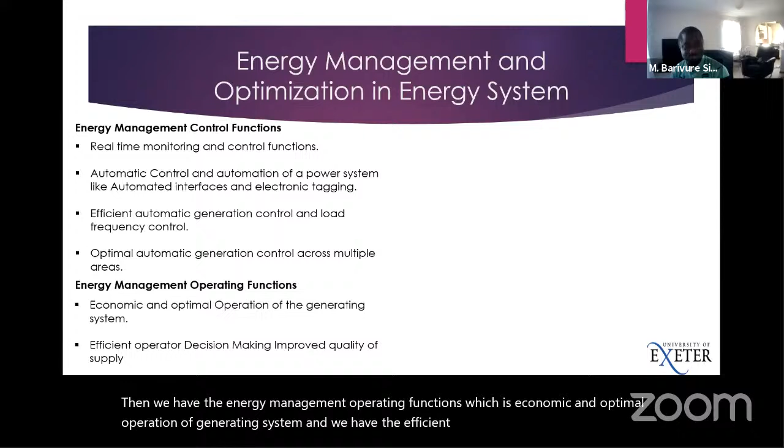Then we have the energy management operating functions, which is economic and optimal operation of the generating system, and efficient operator decision-making, improved quality of supply. So it's all about making the right decision at a particular time, and also improving the quality of supply.

We also have the optimization function, which is optimal utilization of the transmission network, power scheduling interchange between areas, optimal allocation of resources, and immediate overview of the power generation interchange and reserves. So these are the three main points: the control function, the operating function, and the optimization function.

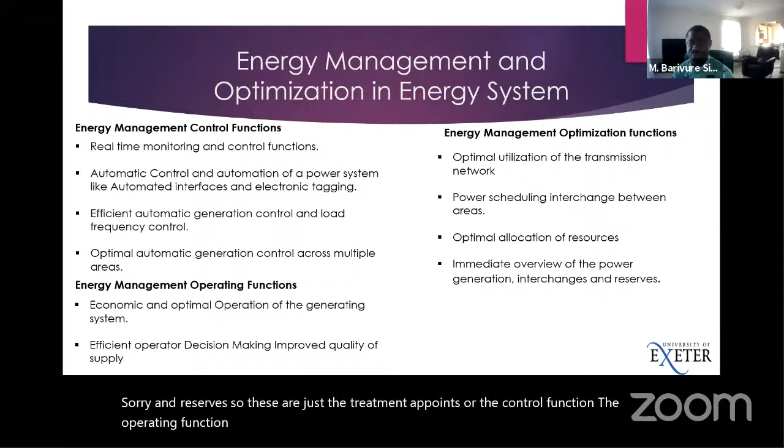So we'll look at the planning function: improve quality of supply and system reliability. You can do this ahead of time, forecasting of load and load patterns. If you can predict or forecast your load and load patterns, then you can plan how to meet up this load, and it will help your economic operation of the system.

Generation scheduling based on load forecast and trading schedule. You want to have a clear-cut plan. Trading has to do with the power you sell, and in most cases now, because of the way renewable energy operates, even as a consumer you can also sell power. So you can have a solar panel in your house and produce more energy than you need, and sell it to the grid.

I don't know if that's applicable in Indonesia at the moment. In most developing countries it's not, but in the UK it's available. But people have found out that it's not economical selling the power, it's economical storing it. So people would rather provide an energy storage system and store their excess power and use it later than sell it to the grid.

Maintaining reserves and committed transactions. When you talk about maintaining reserves, because of proper planning, you would know how to reserve, because you don't want to have a failed system. Security of supply is something you want to be guaranteed. So if you have good reserves, if there's an immediate peak load, you can always meet it, which is what we use energy storage mostly for.

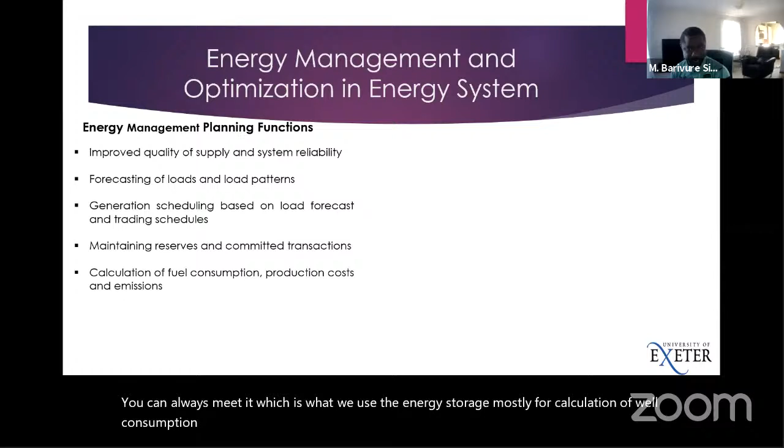Calculation of fuel consumption, production cost, and emission. So these are things that you do as well with the planning function.

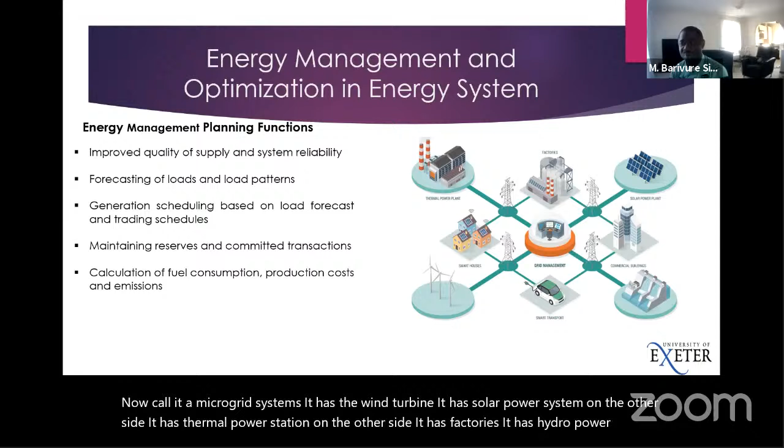I'll have an image here of what I'll call a microgrid system. It has a wind turbine, a solar powered system on one side, a thermal power station on the other side, factories, a hydro power station, and some commercial buildings on the other side. If you look at the grid management system at the center, that's the energy management system, which manages this entire system to ensure it runs economically and follows all the planning schedule, the control, and everything is done from that center. From there, they can dispatch, and they know when to switch up the thermal plants and all that.

Optimization objectives in energy systems. I think we're going to be rounding up around here just to look at what optimization does. I have a little picture here that shows three things. The price you pay — as a consumer, optimization can help you reduce the price you pay, which is price optimization, defined as the average unit price divided by the energy you consume.

Energy consumption. So you decrease the amount of energy we use. Remember at the beginning, I told you that if you look at the UK energy data, it says as at 1975, where they had a lower population, they were consuming more energy than they are consuming today. So they've been able to decrease their energy consumption using this type of optimization.

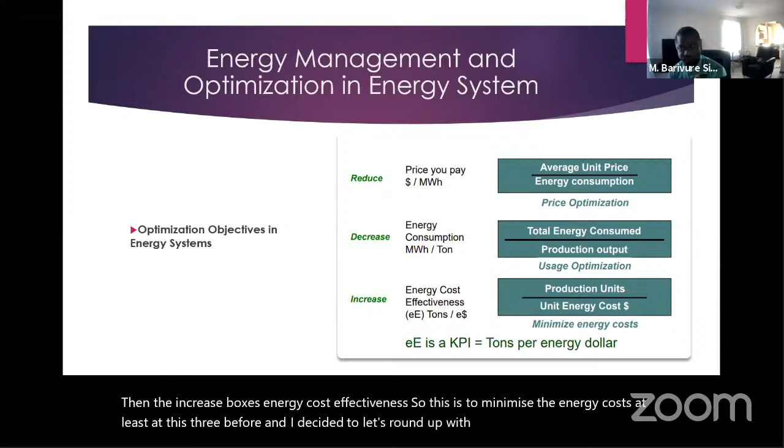These are objectives. Then the last part says energy cost effectiveness. So this is to minimize the energy cost. I've listed these three before, and I decided to round up with this. So this is what optimization does for you, these three things in power systems.

So we can look at the techniques that are used in optimization. I'm not going to explain because I've taken loads of your time. We've been talking for almost 1 hour now. Power and energy management techniques for microgrids basically look at the optimization-based techniques. So all of these are different optimization-based techniques, and they're divided into two methods. We have approximate methods, and then we have exact mathematical methods of optimization.

You could see artificial intelligence, heuristics. For me, I work basically on the exact mathematical models, and my interest is linear models. So you see mixed integer linear programming is what I like, because for me, I think it gives me the best result in managing energy systems. But you can have a look at all of this.

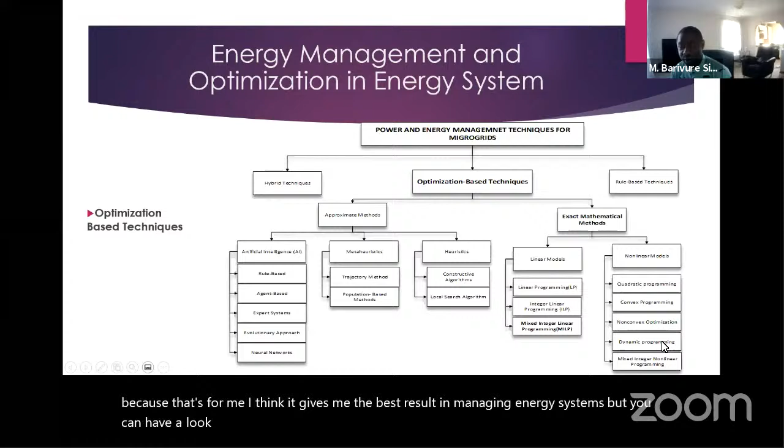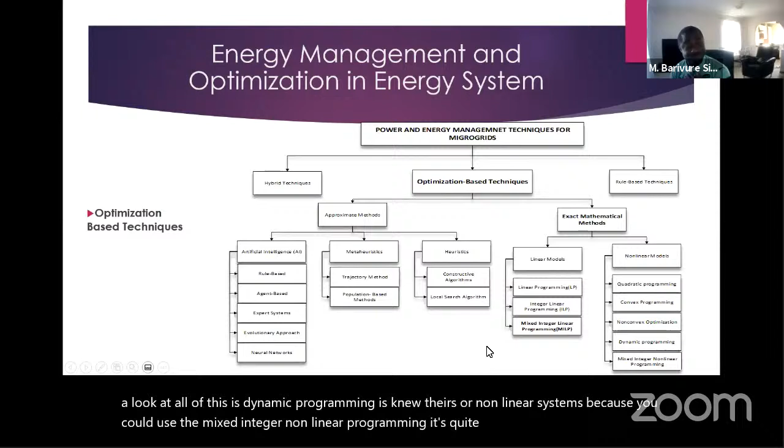There's dynamic programming, which is under the non-linear systems, because you can use mixed integer non-linear programming. It's very interesting. It could be taxing, but you have all of this as what is used as techniques for optimization.

So they failed. And then because of the harsh temperatures, other conventional systems also failed and they could not have power, and they use power for everything. That tells you the importance of power. Power is used for heating. So once there is no power, there was no heating. Once there was no gas supply, there was no heating. And that was the issue in Texas.

And now a lot of people have resigned. So the MD of the company has resigned, whether it was human error or not. What was stated in the media is that this thing has happened before in Texas, but they did not take it seriously. So they did not follow on researches to improve on their energy system so that it could stand this kind of condition. And now it came up again. That's why a lot of people had resigned from their position in the company that manages the biggest power company in Texas. That's the main reason.

So that's what we're talking about. Modeling is very important. Even after modeling, you might not get all you need in your model. But when you do an installation and you begin to have challenges, you need to go back to look at how to mitigate those challenges. This wasn't done in Texas, and hence they had the challenges they had. So it's not like they've not had extreme temperatures before that led to blackout. They have had. It wasn't as bad as the second time. They didn't do anything about it. They felt it's one of those things. And then at the end of the day, it comes again, and some people had to be sacked. So it's not like